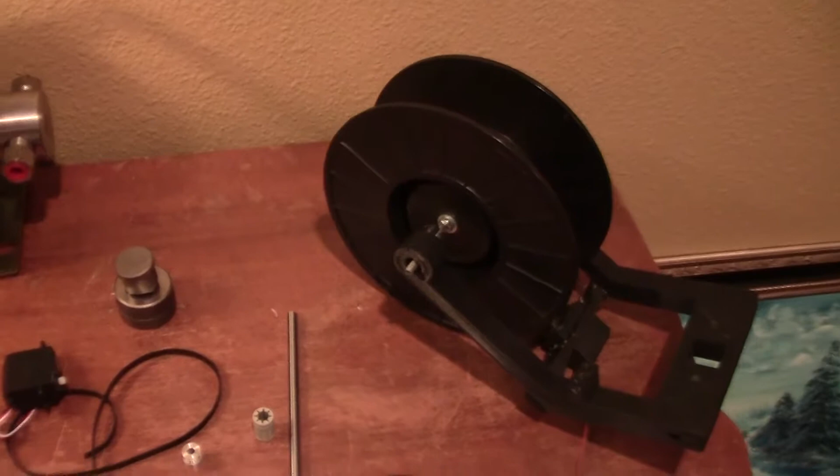Alright, so basically most of this update for these 2 weeks, we're going to be talking about the multi-extruder here. These are the modules that will go onto this guy as the winder. I have all the parts now.

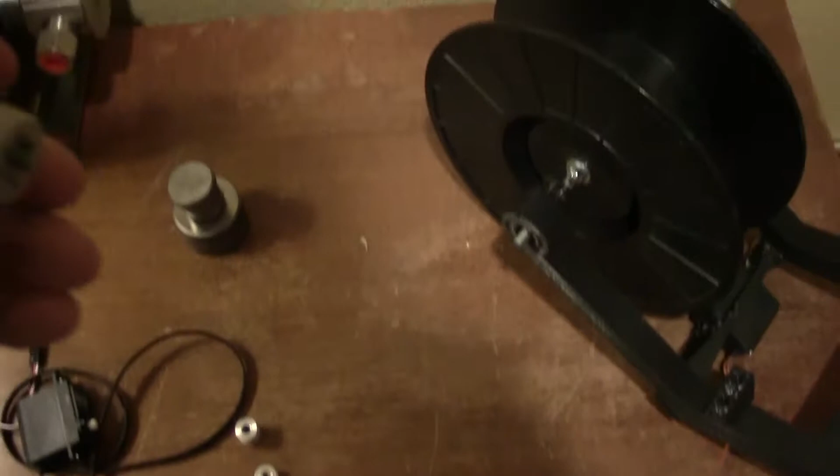This is an 8mm chromed rod, just like on a 3D printer. And then here I have a drylin bushing, LM8UU, equivalent bushing RJ4JP, and you'll see here that these are actually really nice.

Also, as you notice, I do not have my tripod. My brother has a tripod, so this is just going to have to be how it is. But this bushing is really nice, can't really hear anything. So I do really like that, I have to make all my printer designs have this.

So parts: 8mm linear rod, 8mm diameter, about 4 1/4 inch long after I cut it. Drylin LM8UU short. Then an idler pulley 16 tooth, and an actual pulley 16 tooth with a 5mm bore. And here I have a 4-turn sail winch servo.

This guy is going to be controlled by Arduino, I'll talk about that in a second. This is just 6mm wide GT2 belt to go with these two pulleys. This pulley goes on the servo, and this idler goes elsewhere to the other side of this pulley. I'm going to show you in a second what this looks like.

This weekend, last weekend I was studying for a test, so I didn't really do much. This weekend I got this guy, it just came in the mail.

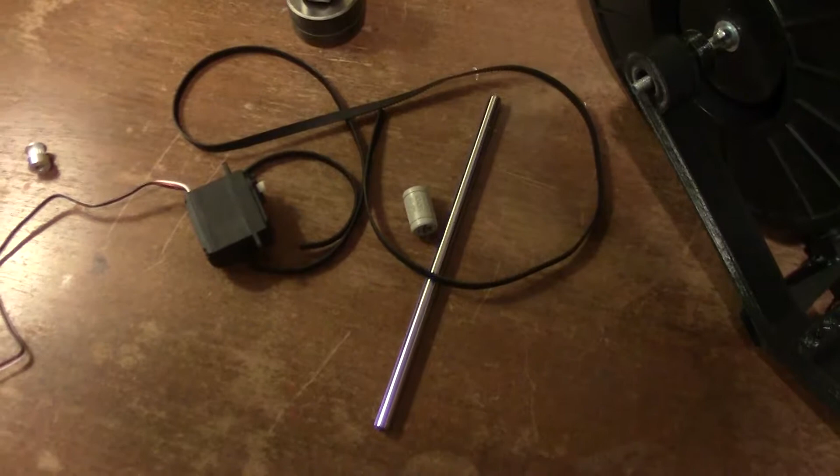So now I have all the parts to put it together, and I've tested this guy, but for some reason this guy gets 8.5 turns instead of 4 turns. So I have only about half as much resolution, but it turns out that I get exactly about 1.5 millimeters per degree from 0 to 180 degrees, that's scaled on the servo library.

So I actually get 1.5 millimeters of travel over this distance, and with this pulley, this pulley is what dictates that, the 16-tooth pulley. That times 2 is 3 millimeters, so it should actually work okay, but I do want to find another solution where it has less turns.

I don't know why, but it says 4 turns, but I actually get 8.5 turns. I don't know if that means 4 turns one way and then 4 turns the other way, which doesn't make any sense. But obviously it didn't work out, so I'm going to do some more investigating on that, but as of right now, that's what it looks like. That guy's going to mount where this guy is currently.

This weekend, in addition, Saturday I did the code for this guy. I looked at this guy, counted the number of turns, and then ran a simulation of how it would look when it was moving, and it all looks pretty good.

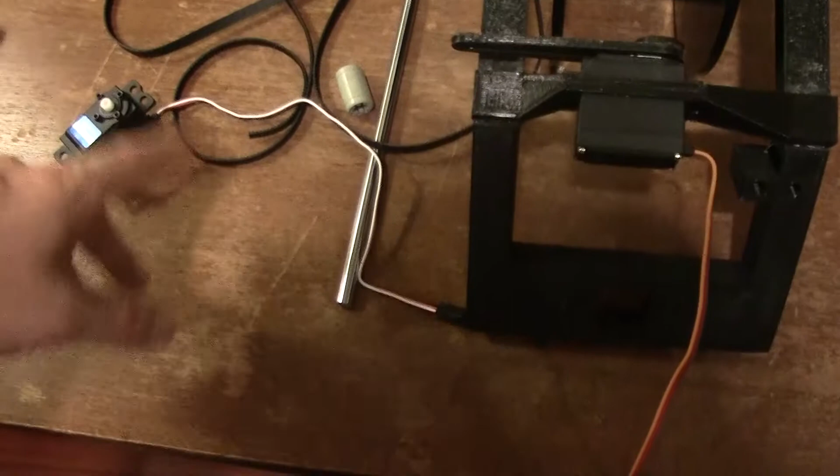This is a sail winch, and it actually came with something to wind up a sail. So with a Sharpie, I did a mark on that, and then did a whole bunch of math, looked at how many turns it had, and looked at the resolution to make sure it would work. That guy's actually going to be mounted where this guy is right now.

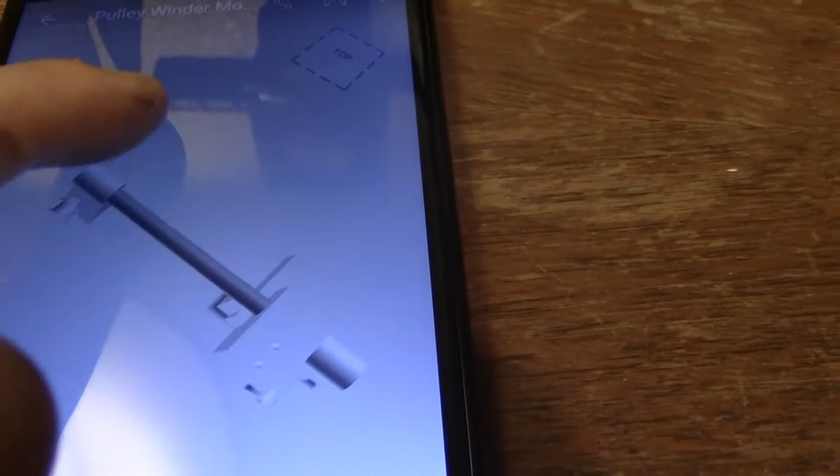I'll show you guys. I was going to do a printout, but that didn't work out, so I'll show you on my phone here. I use Fusion 360, so this is the app. Let me go ahead, this is on my cheap phone.

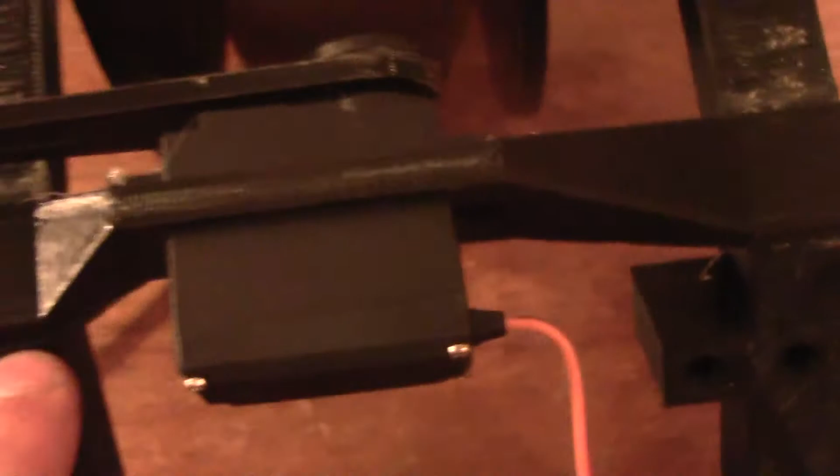As you see here, on the left hand side we have the idler pulley, and on the right hand side we have the regular pulley. You can see that this is a 3D printed part, basically the same thing as this one. It's flat on the bottom, so it's easily printed on the bed.

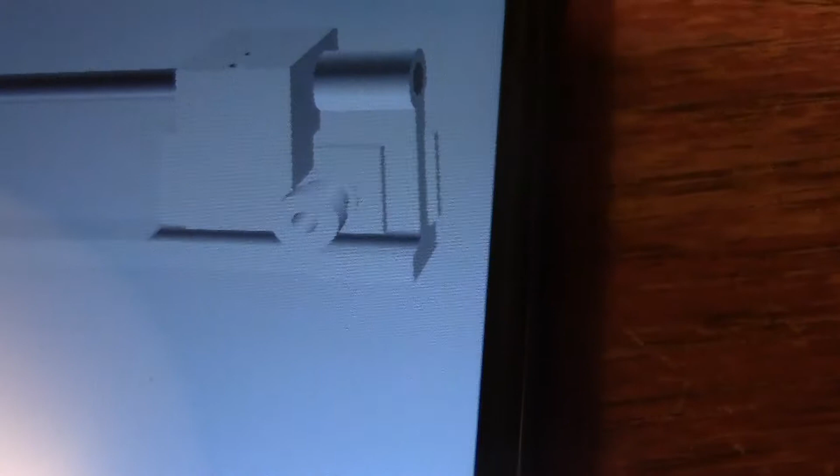You can see it has a linear rail going in between, and this piece right here is a slide that slides back and forth. On top, I'm going to put my little filament loop that grabs the filament and moves it back and forth. Right there attached to the pulley you can kind of see the outline of my servo.

Here you can see the servo flap popping out the right hand side. The servo goes in there and then is super glued, or I'm going to screw it down or do something. This slider on the bottom, you can see where the top meets the top of the pulley, down there the belt is going to be bolted down.

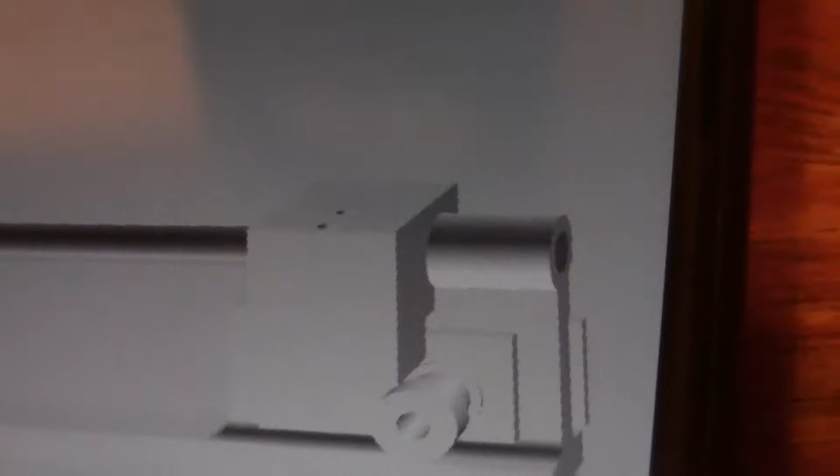That's why you see the 2 holes in the top. The 2 holes in the top are for M3 screws to go through there and hold the belt down with a clamp so that the belt stays tight, and it's a 2-part belt.

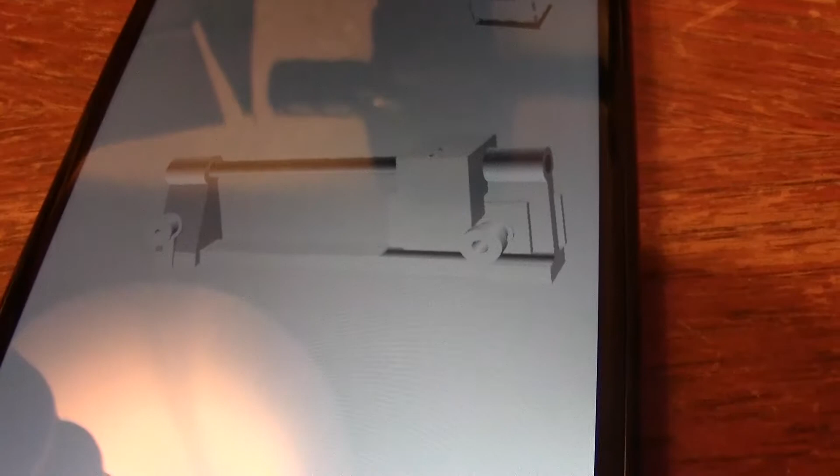So this guy is basically going to be glued down on the bottom. Pretty simple design, and I did some testing. It looks like it checks out with all collisions and all that stuff. So everything looks pretty good.

Hopefully you guys could see that. This is a better angle. You can see the servo popping out, and you can see the slider, how it pops out, and then how it has room for the 2 bolts and also the 6mm belt.

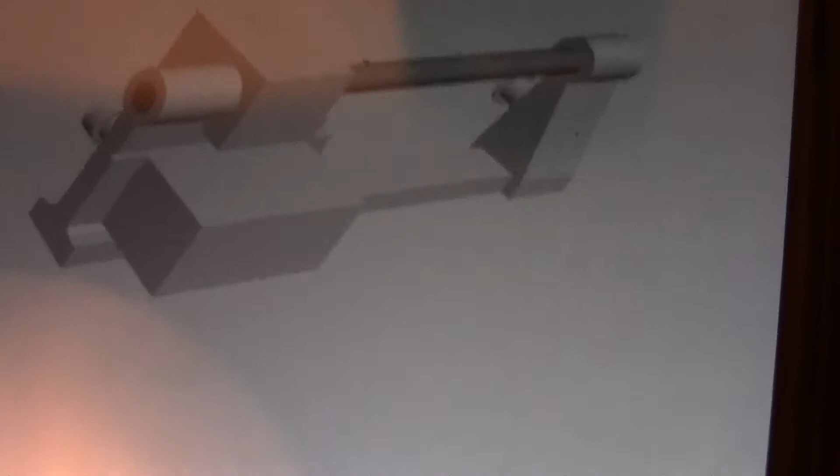Here's the back side. So hopefully this coming weekend, since today's Sunday night, I can do the 3D printing to verify this, and everything should look pretty good.

It doesn't actually look like it, but I did model the thing. I did model the drylin bushing. It is actually in there, it's just that they're both the same material, so it doesn't show up.

Another thing that really helps this project is that it's a class project now, so I have myself and another guy on my team. This has to be done by the end of the semester, otherwise I don't get credit for it. So it's really pushed me forward on getting this developed and finished, because not only is my grade counting on it now, but I need it done to get all the multi-shooters out to the backers who've asked for them, and also the people who have backed the extra modules.

Hopefully you saw that on the screen. Just a little teaser. I should definitely have something within the next 2 weeks.

It's just that this guy took so long to get here. I'm probably going to use this guy just as a stand-in, and then I'm going to find something with actually 4 turns, and that will be perfect for this application. Then I'll actually use that one as the real one.

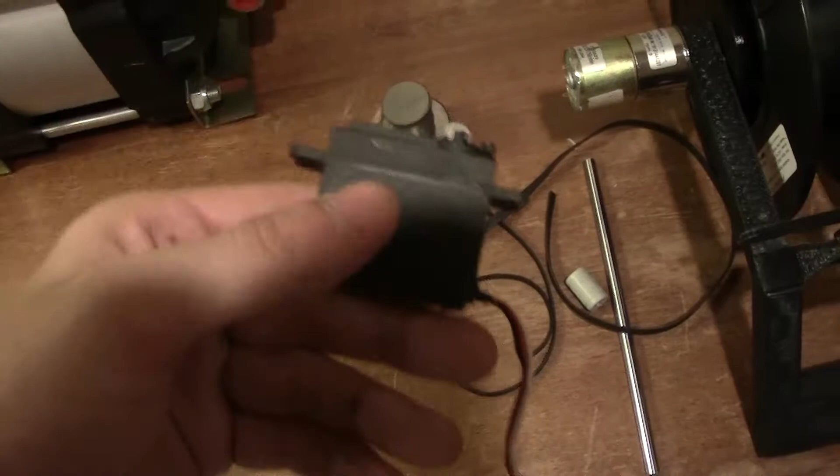But it turns out that most of these housings are pretty much identical. So this is kind of the same as the last housing I had, just a half turn compared to an 8.5 turn.

That shouldn't require much changing on the model. It should just require getting this guy unglued with some acetone, or it's just super glue or hot glue holding it first. Take this one out, put the other one on.

Should be okay. And the other one might even have - the one I'm looking at has a metal spline. So that would be even better, metal gears.

Alright, so yeah, that's basically it. Sorry that I didn't have any printouts, but it looked like it was pretty easy to see on the phone. There was a little bit of glare, but that's okay.

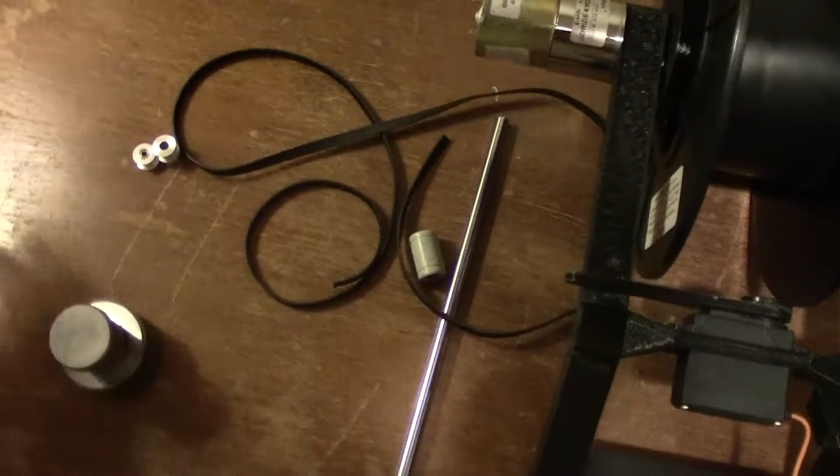Alright, then one other project I was talking about that I'm really excited about, which I'm going to get some time in on next week. While the printer's running, I'm going to run to San Francisco and try to do this second option I had for the reclaimer, which is my plastic shredder.

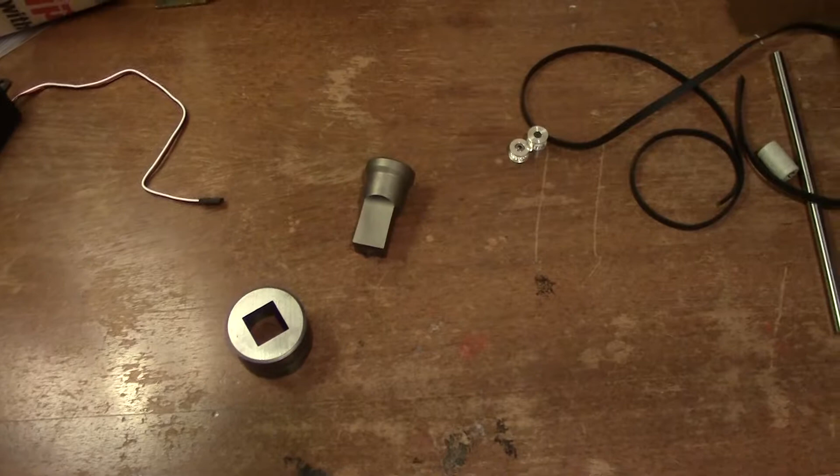Back when Tech Shop was still around, they had Tech Shop Redwood City, and there they had a plasma cutter. What I did to design my reclaimer was use all 1/4-inch plate 1055 steel.

So basically I bought a giant 8-foot by 4-foot sheet that weighed about 300 pounds, 1/4-inch thick, and I loaded it on the plasma cutter and tried to get some cuts out of it, but it had too much taper.

I don't know if you know, but when you cut with a laser, a plasma, or a water jet, there's actually a V-like taper. So the top is oversized, but the bottom is undersized. Depending on how good your machine is, or how slow you go, depending on the machine technology you use, that taper will be adjusted accordingly.

It actually had nasty amounts of taper, to where I wasn't able to slide the precision ground rod - that's the drive shaft, the square 1/4-inch by 3/4-inch by 3/4-inch shaft - into the hole to drive it, because the tolerances were so off. And even if I got it to fit, there was only going to be a little bit touching.

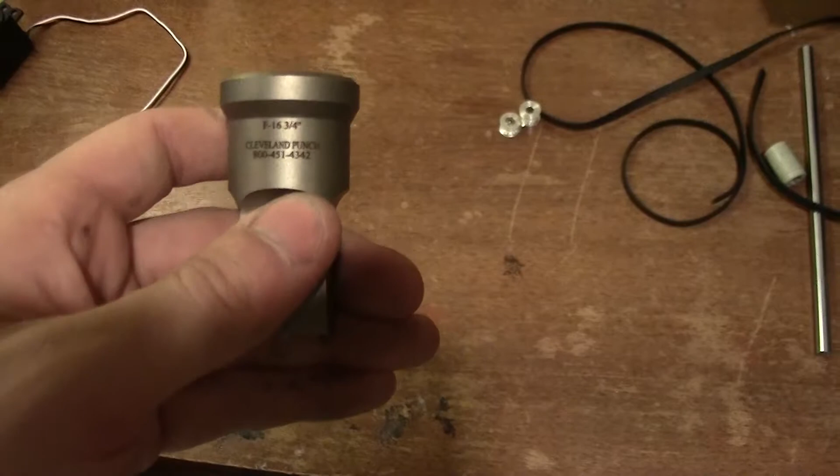So what I decided to do is use the new shop, shop.build in San Francisco, which has an iron worker - basically a very high pressure hydraulic press with a punch and die setup.

So what I did is I went to Cleveland Punch and Die, who's been around since 1880, and I got a 3/4 by 3/4 by 3/4 square punch and die with a specific tolerance that they recommended. The tolerance is actually, I think he said, 32 thou per side.

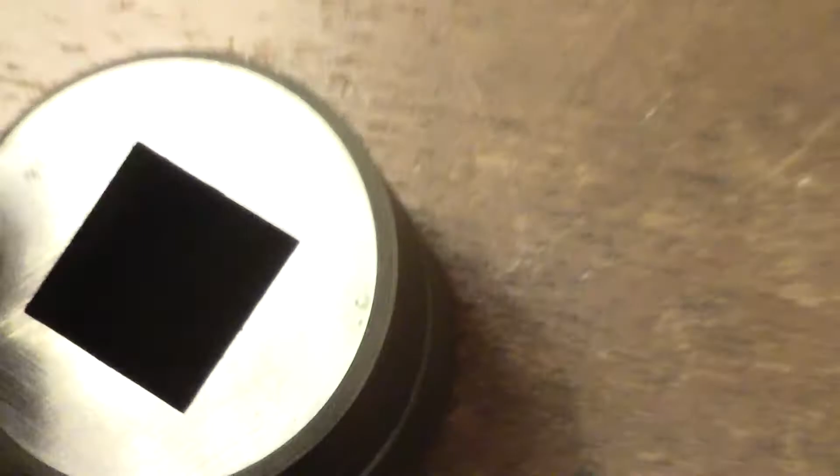You can actually see it's quite a bit. So I'm going to load this into that iron worker, put those pieces that I need to chase the holes on, and then punch it with this punch, and it should chase those holes.

That way I could try to get some of those reclaimers back, because I have about eight of those shredders and parts to get out to the people I owe them to. So I'm going to give that a shot next week, next weekend, and see how that goes, and see if I could assemble a few more.